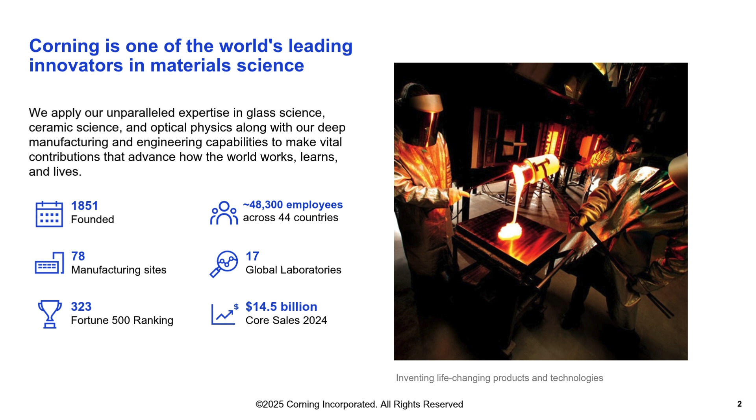Corning's pretty proud of its track record of innovations. One relevant for us is the invention of the substrate for catalytic converters. The first extruded catalyst was invented by Corning. We celebrated the 50th anniversary 3 years ago. Very important for us is optical fiber. Currently, AI data centers rely heavily on Corning products. And then smartphones, we are leading the market for smartphone cover glass, LCD, OLED glass, and so on. So these are the segments where Corning is very active.

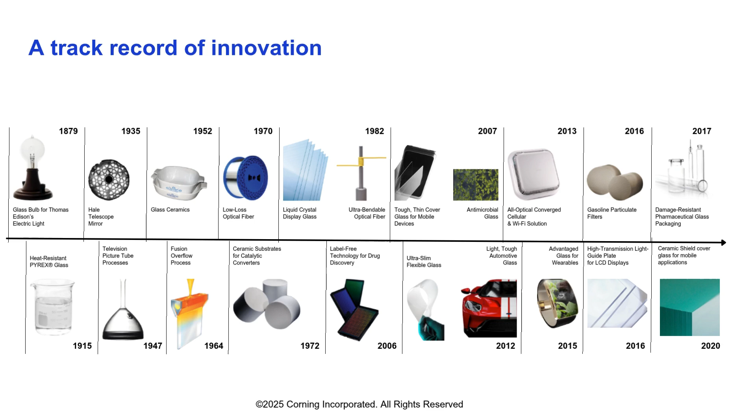But today, we're going to talk about non-road machinery. I want to share my thoughts on the challenges of decarbonization. I want to show our view on different architectures for different fuels like gas engines and hydrogen engines, and talk a little bit about substrates and filters. You just saw in the previous presentation how important filter design is and how it impacts performance. This gets even more important if we get stricter regulations.

I want to show then 2 examples from a recent publication. We had something at SAE, a DOC on filter. Interesting maybe because it could be more compact than a separate DOC and DPF. And then we recently did a study on natural gas applications on highway, but in case this becomes important for off-highway, we looked into the impact of CPSI, cells per square inch, so basically the number of cells a catalytic converter has. And then I'm going to summarize.

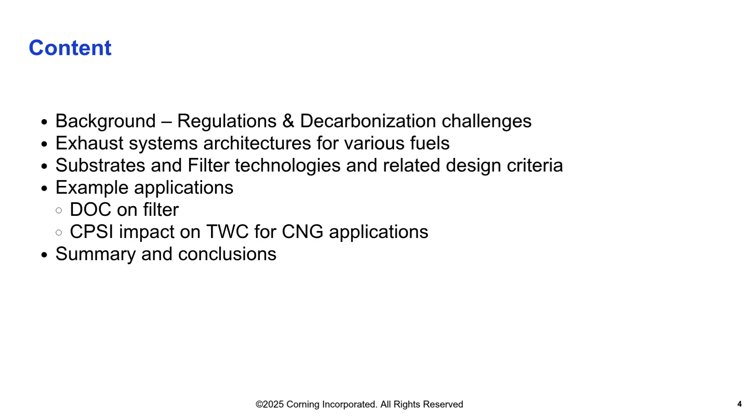Mentioning the challenges, I share many of those that were discussed yesterday. So there are the operational challenges. Permanent high power density needs draw a battery empty pretty soon. Multi-shift operation is a big challenge for electrification. Downtime, like swapping a battery package versus refueling versus charging. Then the complexity of duty cycles, space constraints, and so on.

On energy supply, we discussed a lot yesterday. The issue is we don't get the electrical grid to all places, right? And high power fast charging, we learned yesterday in the Volvo talk, is not even available in rural applications. So there's a truck running around recharging the machines, which sounds like a big hassle.

Economic barriers are very high. Non-road is cost sensitive like on-road, maybe in the same range. Batteries are still more expensive than aftertreatment. And fuel cost savings, of course, depend; the hydrogen price at the moment is super unattractive. In Germany, we have like 15 euros per kilogram. At the Hydrogen Alliance conference, they said we may get to 6 to 8 euros per kilogram once we have a high load factor, but this is in the future, like the e-fuel price.

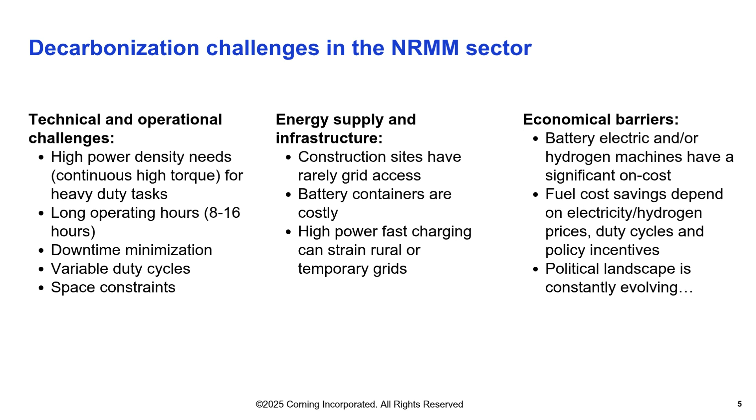At the moment, the economic barriers for alternative fuels are very high, and then there's the landscape of subsidies, where we basically have to rely on our politicians, which is also a challenge.

Looking into regulations, Johnson Matthey yesterday gave a nice outlook on how it could potentially look. We put a question mark behind US Tier 5 due to the current administration, but of course we hope it's coming. For Europe, Stage 6, I also put a question mark because the date of introduction is unclear. We know the Commission is working on it. They're supposed to propose something, but the timing is uncertain.

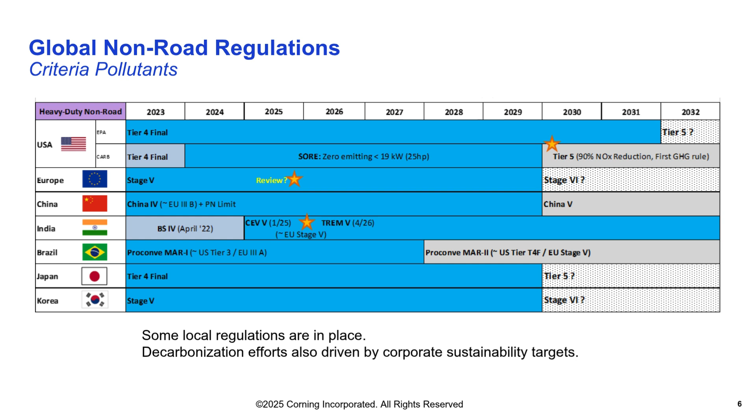The expectation I share with Johnson Matthey is we will get PN10. We get a lower PN number, and after seeing the Volvo presentation yesterday, I hope that we get lower limits also for the low power machines below 19 kilowatts; more stringent NOx and PM targets would be good for those cities who still allow combustion machines. For China, we see China 5 in 2030, and for India, TREM 5 next year.

This is a table I took from the internet. I think it's a good starting point to discuss fuel properties and groups of fuels that could be alternatives, starting with low sulfur diesel as a reference, and then there's biodiesel out in the market, and there's HVO in the market. HVO, you just hear very positive feedback. The feedback is very good. It really is a drop-in for fossil diesel.

CO2 potential is between 70-80%, I think. It requires hydrogen for the process. The biodiesel is also nothing new, available since a very long time, but is more tricky, I guess, than HVO. There, the devil is in the details for biodiesel. It's like the quality, and also biodiesel needs stabilizing agents that could be critical for some of the catalysts that are in an after-treatment system. But HVO is very uncritical, I hear, throughout the industry.

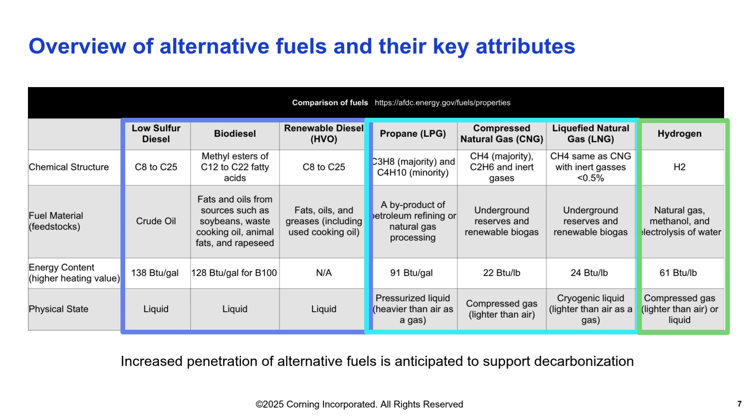Talking about gaseous hydrocarbons, not very widely used, I guess, for non-road machinery. In China, currently booming for on-road transportation, and also nothing new. There's available technology to address emissions from gas engines. And then the last in my list I want to discuss today is hydrogen, and we just saw it in the Liebherr presentation. Hydrogen works. It is a feasible solution as low carbon fuel or zero carbon fuel.

HVO, as I said, equivalent to diesel. For biodiesel, elevated NOx emissions due to the higher oxygen content of the fuel, leading to more NOx formation in the combustion chamber. This could be addressed by a machine dedicated to biodiesel. You could address this by, for example, more SCR volume, and to get more volume into the same space, you typically just increase the CPSI.

Gaseous hydrocarbons, looking into a stoichiometric engine. In on-road, they are equipped with a three-way catalyst, one substrate versus a complex after-treatment for diesel. And then a filter is optional. We see filters in Europe already for Euro 6 in place, for buses and so on. They use filters, but the limits can be achieved also without filters. So it's up to the OEM to decide whether he needs a filter, because the emissions basically occur from oil combustion, more or less. The low reactivity of methane is a problem for the catalyst companies.

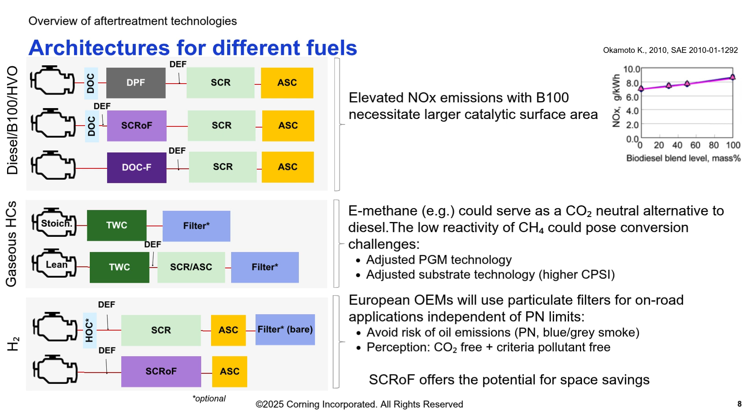SCR on filter, if you optimize it for hydrogen utilization, offers the potential to have a more compact system versus the diesel system. You might free up some space for hydrogen tanks. This can be the case for on-road and off-road applications.

The microstructure starts to get complicated because you can play around with porosity and microstructure in the form of mean pore size. And this gives you many, many combinations already of product design. To simplify, a smaller mean pore size boosts filtration efficiency, and higher porosity enables high permeability, meaning low pressure drop.

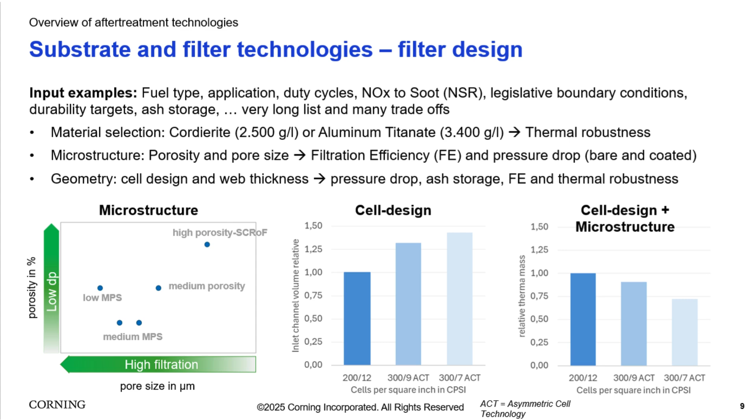The middle diagram, cell design. Yesterday we saw Texaco, it was about ash storage and maintenance, and purely by design you can increase your durability if you go from a 212 as reference here, and then you go to a 307 ACT design. ACT means asymmetric cell technology. You get more than 30% more inlet channel volume, and you can do modeling or very complicated simulations, but basically it's a geometrical measure, your inlet channel volume, and that describes the durability for your ash. The bigger the inlet channel volume, the higher the durability, very simple.

And the right one is the impact from cell design on thermal mass. So even if you use the same porosity and same material, based on the number of channels and web thickness, you get a different thermal mass. Now here the 212 has a higher thermal mass than the 307, meaning a 212 offers you more thermal robustness versus a 307. Of course, you can make this diagram now for any porosity, and then you get a different picture, but this illustrates that there's a trade-off in any direction, right? You change this, you get another change for another property.

From filters, we use the same technologies and designs or similar designs for diesel, for gasoline, and so on. So surprisingly, they're all very similar filters for gas engines and for diesel engines, because a passive operated system does not have a very strong requirement for thermal robustness, and the soot load is typically fairly low.

Second is substrates. So substrates, I said 404 is a typical product used in diesel, but there's more products around. Like 206 is used in position 1 when you only want to have a certain conversion and a very low pressure drop. We have 305 as an alternative. And we have ultra thin wall products. If you need more catalytic performance, we go to 403, 603, 602, and all this is size dependent.

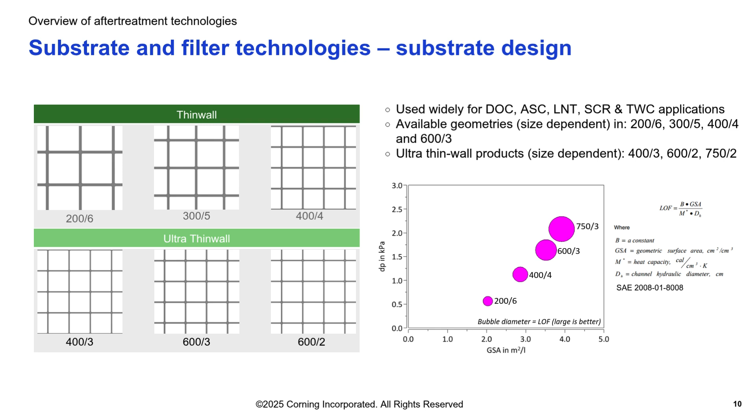The diagram with the bubbles shows you pressure drop on the y-axis and geometric surface area on the x-axis. And the diameter of the bubble is the so-called light-off factor. That's a simple correlation to emissions performance. While a lot of surface area, of course, enables you to have more catalyst, the smaller diameter of the high CPSI gives you better diffusion. So there's a better interaction between the exhaust and the catalyst on the substrate. You will see that later on when I talk about the CNG results. But specifically if you're space constrained, higher CPSI is one way to get more catalyst into the same package space.

2 example applications. DOC on filter is the first one. We had an SAE paper this year. I took 2 diagrams from this year's SAE paper. So you see the left diagram, on the Y is PN filtration efficiency, on the X is soot load in grams per liter. So first of all, with soot, every filter filters super good, right? There's no issue. Soot is a super filtration enhancer. When you look at the 0 cross point of the diagram, you see that the blue filter, which is low mean pore size, is significantly better than the red filter's medium pore size.

And in this diagram, which is very busy, you see there is DOC plus bare filter, there's DOC plus coated DPF, and there's DOC on filter. But it doesn't really change the picture of the filtration efficiency. A low mean pore size filter is better than a medium pore size. That's the conclusion of this diagram.

Is this important for non-road? Yes, because even in a ramp mode cycle or in a steady state cycle, you run at maybe a high NOx to soot ratio, elevated temperature, you burn off your soot cake and you suddenly see soot slip. So a good base filter is also important for non-road, specifically if your engine is a non-EGR engine, very clean with high NOx to soot ratio, filter property is important.

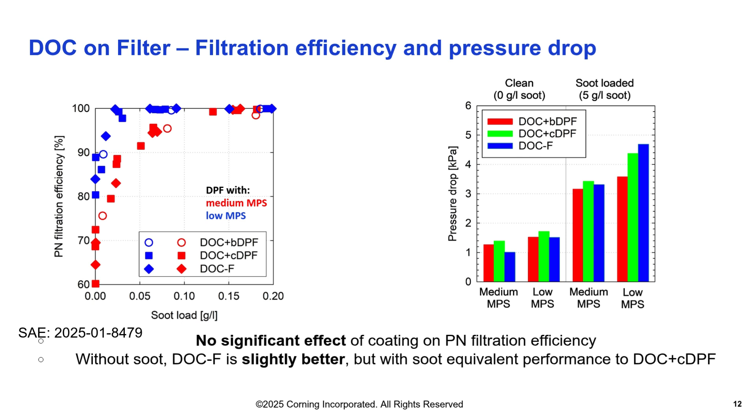The right diagram is the impact on pressure drop, comparing again medium versus low mean pore size. Soot loaded, you see the low mean pore size filter has a little bit higher pressure drop, but it's not dramatic, and the highest penalty you have is with the DOC on filter technology.

In the recent study we did at DOC on filter, we also looked into regeneration efficiency, and we looked into both cases, active and passive, and Mr. Pfeiffer explained it very nicely. Passive is by means of NO2, and active is by means of temperature. You see that in the passive system, that's the top diagram on the left side, the coated filters, either DOC or DOC on filter or DOC and coated DPF, outperform the bare DPF, which is the red circles,

the empty circle. Below, where you have active regen by means of hydrocarbon injection, the regen efficiency of the DOC on filter falls behind the other two versions. And the reason is shown in the right diagram. If you use hydrocarbons to regenerate the filter, you need catalyst to boost the temperature, to convert, to create exotherm.

And then at the inlet of the catalyst, the x-axis is the DPF length, there is no catalyst because you first need to move in the axial direction to get an exotherm. So for an actively regenerated system, a DOC-on filter has its disadvantages or challenges. But for passive regen, we think DOC-on filter is a feasible way to get to a more compact system.

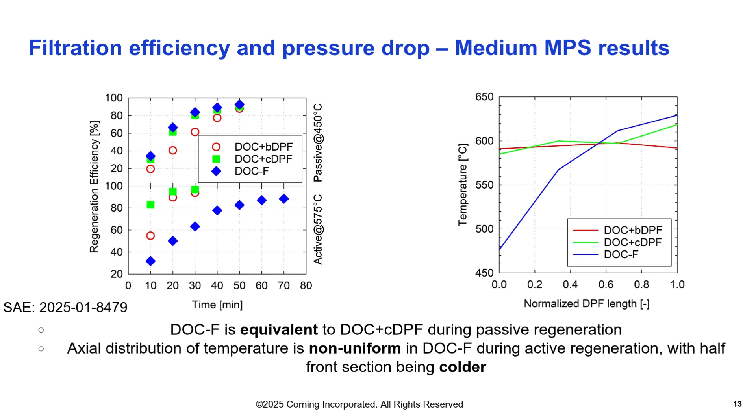The last technical example I want to show here is the impact of CPSI on conversion in a natural gas on-road example, a 13-liter engine. All three configurations had the same PGM. You see, this is an average of 6 repeats, that the 750 substrate showed higher bed temperature versus the other configurations, and that's an indication of better catalytic activity, leading to higher temperature, and higher temperature leads to higher conversion. So the methane slip is optimized at no PGM cost by using a higher CPSI substrate.

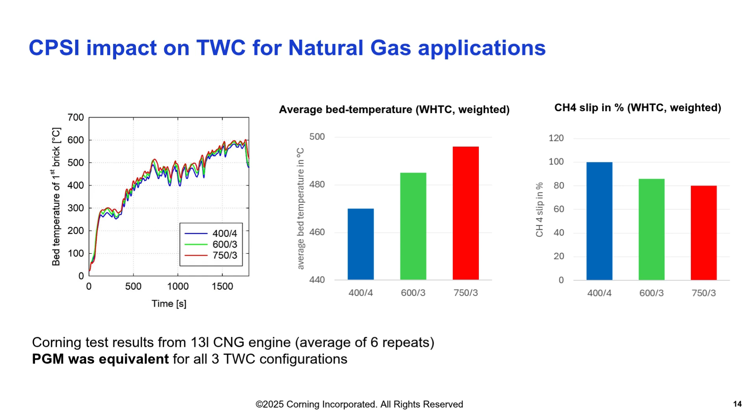So that's the end of my presentation. The good news is we have products for the current legislation stages in case we see Tier 5, Stage 6. We have them already in the portfolio. From a filtration side, I think we can address it with our low pore size products. They will be ready for more stringent PN or PM regulations. On the catalytic converter side, higher CPSI can do the job. We do not expect any new technologies required from our end.

We have developed this for Euro 7 on-road. We have everything in the portfolio. A little bit of uncertainty on the heating, how to get the first SCR warm. I guess the regulation will be done in a way that electrical catalytic heaters are not needed. So again, I think we have everything already in our portfolio.

I showed some results from DOC on filter, which look promising, but there is a disadvantage associated, which is the active regeneration. And then I just wanted to put your emphasis a little bit on, if you talk about substrates, keep in mind there's more than one substrate available. We have different technologies ready for you. Thanks.

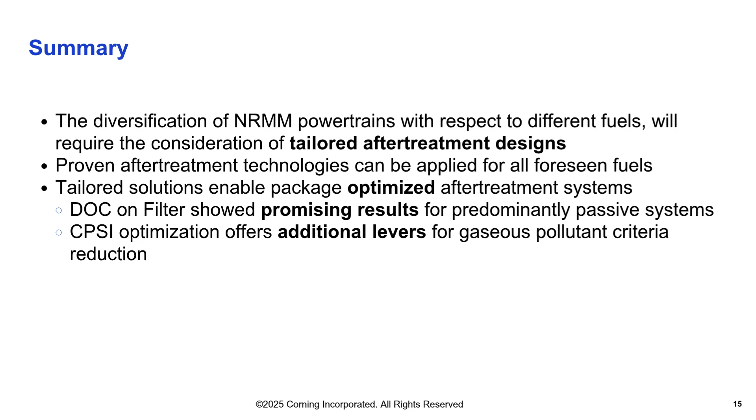Great. Time for questions. Who would like to go first? Any questions from the floor?

I have one question about how many more stages of regulation are conceivable before the exhausts are so clean that it becomes meaningless or cost prohibitive? Are we in an end game? Yeah, that's a good question. I think for Europe, with the decarbonization targets, Euro 7 is the end game, and I would assume that the next stage in on-road legislation would be the last one at a certain achievement level of electrification. It does not make sense for air quality to further regulate the emissions of combustion engines.

But I think what I learned yesterday was really these low power machines. I think they still have an impact on air quality. So there a new regulation is really needed, I guess. That's my personal opinion. Thank you.